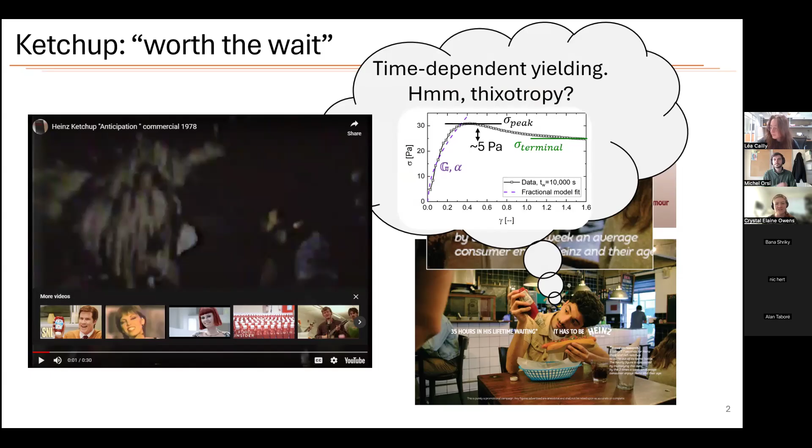Now, ketchup has a couple other impacts that are interesting. Something else you might be familiar with if you eat it a lot is called syneresis, where if you put some ketchup down, it'll have this sort of watery layer, especially in the first bit that you push out. And this is measured industrially by literally putting ketchup within a target, waiting and seeing how it spreads out from there.

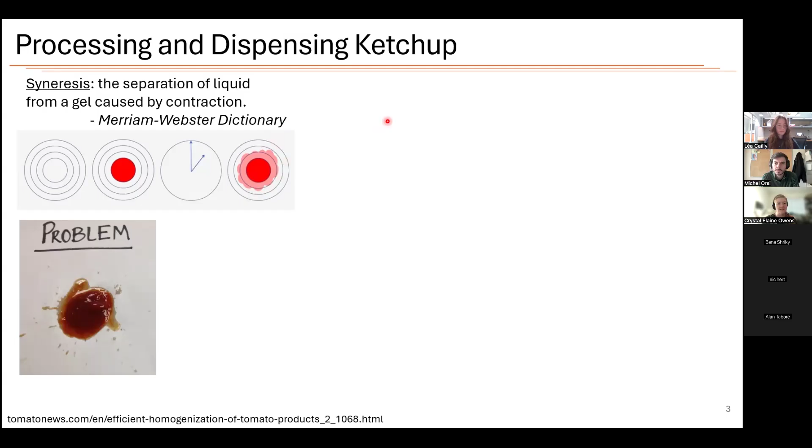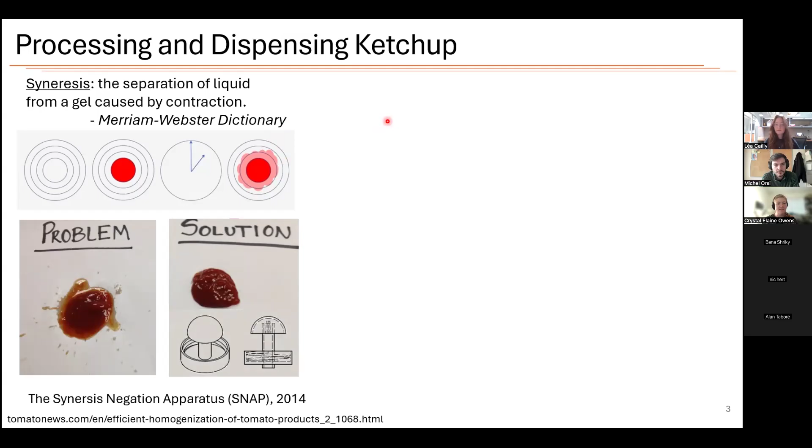And this has actually seen some inventive solutions. The reason this happens is that the water that's naturally in ketchup separates from the gel over time. So if you have something to mix it, like this patented solution, the syneresis negation apparatus, a cap that you attach to the end of your bottle and extrude through, it mixes the ketchup while it comes out, and you no longer have this problem. But this is something I have yet to see on the market shelves. So this is an unsolved problem within the ketchup industry.

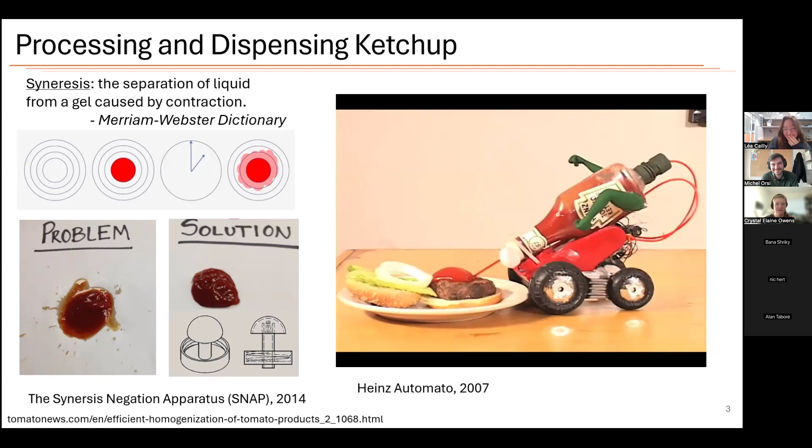One other interesting application of the dispensing of ketchup is the Automato, which is an RC car that someone has made to automatically dispense ketchup. So this is not completely automatic. This is someone who actually has a little remote control that is moving the bottle around to put the ketchup onto the burger.

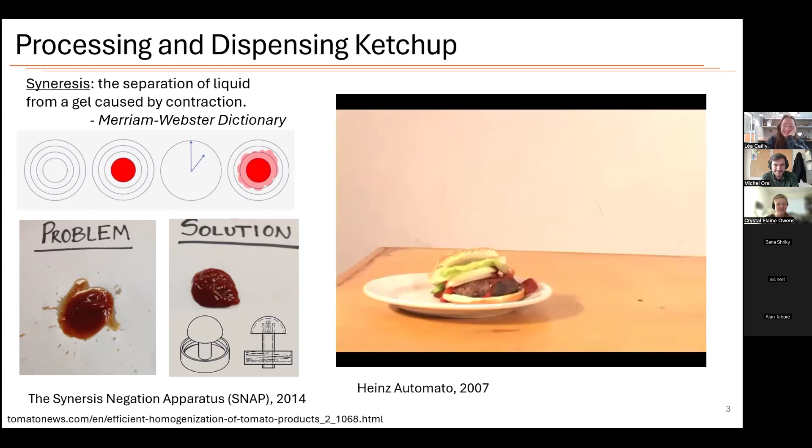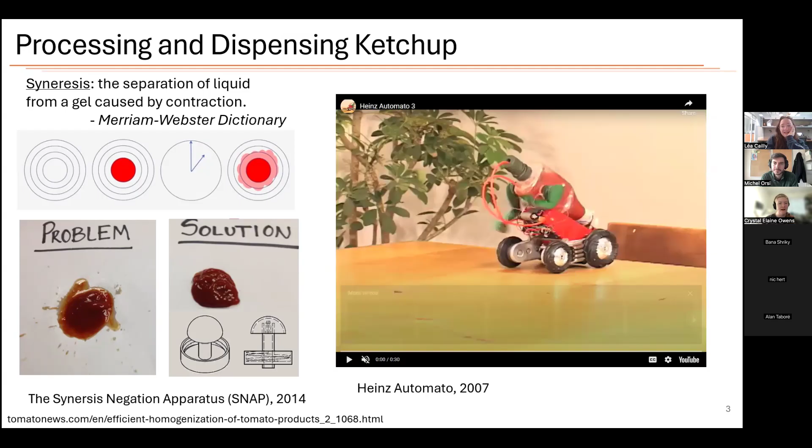And I know ketchup in the context of how popular it is in America, but worldwide, tomatoes are produced in nearly every country in fairly large quantities. So there are hundreds of millions of metric tons of tomatoes per year that result in a few million tons of ketchup every year. And within America, the numbers are a bit hard to track down exactly, but there's 10 to 100 billion ounces that are consumed, resulting in 1 to 10 kilograms per capita.

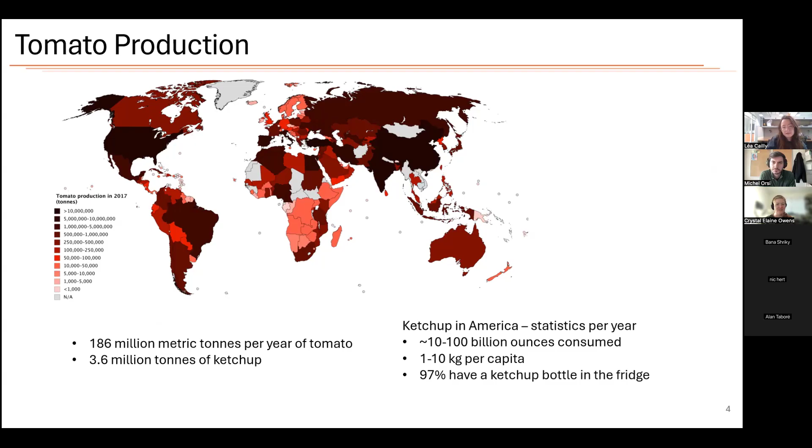So on average, every person has a few kilograms of ketchup. When one ketchup packet is about 9 grams, that means that everyone eats about 100 to 1,000 of these per year, which seems like a reasonable number. But also ketchup is so widespread that one study said that 97% of Americans have a ketchup bottle in the fridge. And so this is also partially motivating our study, that any insight we can have into ketchup can potentially impact 97% of Americans, and whoever else around the world is dealing with ketchup or related salsas or hot sauces or other condiments.

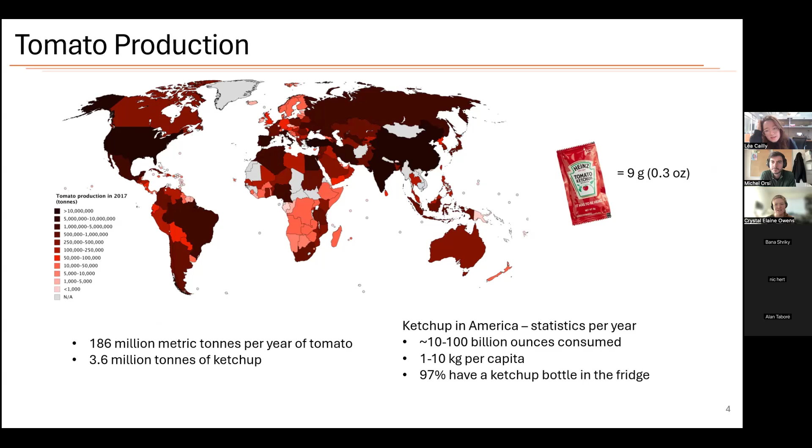And so we started our investigation by doing a natural study of what happens in a ketchup bottle. So this is a regular Heinz squirt bottle that I have with me that I dissected so that we could get a very clear view of what's going on inside. So let's say we deposit a little bit of ketchup on the top corner.

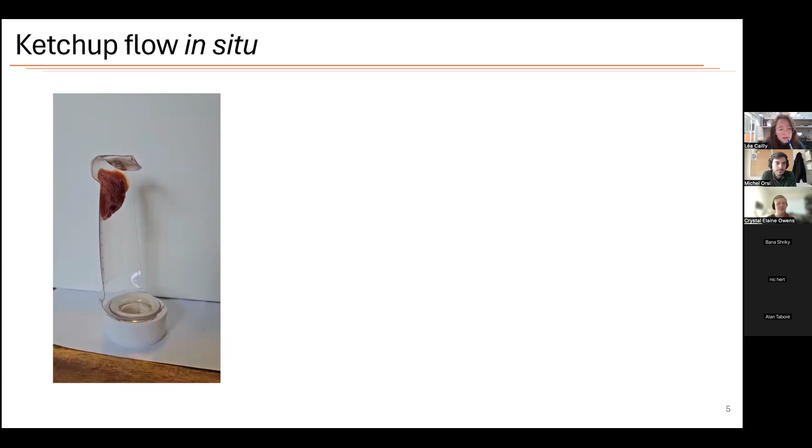And then we can observe what happens here over time. Just under gravity, the ketchup starts to flow. And we can make some back of the envelope calculations, where we want to get what is an average stress experienced by the ketchup during this process.

The ketchup has a force of gravity. It has some characteristic dimension and a density. So maybe this is something like ketchup under a controlled stress experiment of maybe 50 pascals or so. And so it also clearly experiences wall slip.

And so this is something we might say is one case of what happens when you have ketchup you're trying to get out of the bottle. And this is probably one of the best case scenarios because everything kind of comes out smoothly, but it does take quite a while. So if we're thinking about the time of 5.7 seconds, we're definitely slower than that because it takes longer than that for the ketchup to even noticeably start flowing.

In another case, if we start with a lot more ketchup, we see other effects where the ketchup almost immediately starts falling down, but it ends up leaving a streak that stays even after 10 minutes.

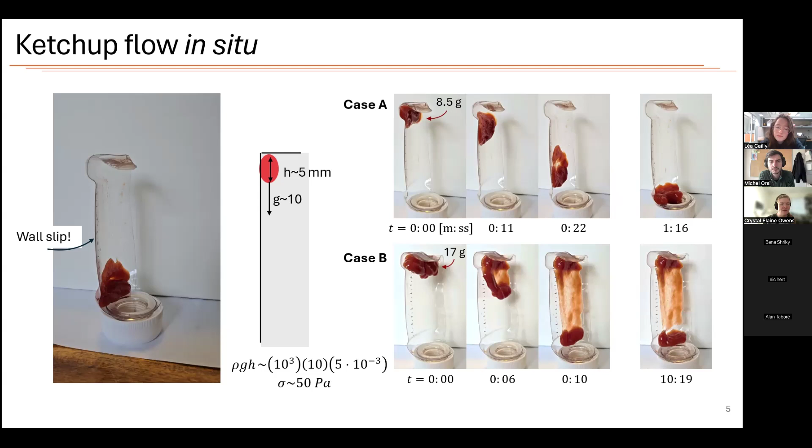And I should also point out that what we're doing is different from what people know as LiquiGlide, which is another product that came out of MIT where people were studying the surface coating of bottles so that they could get all of the ketchup out of a bottle, where they have an oil impregnated textured surface within the bottle. But in this case, for this presentation, we're discussing the ketchup material itself and not really the surface or the surface coating.

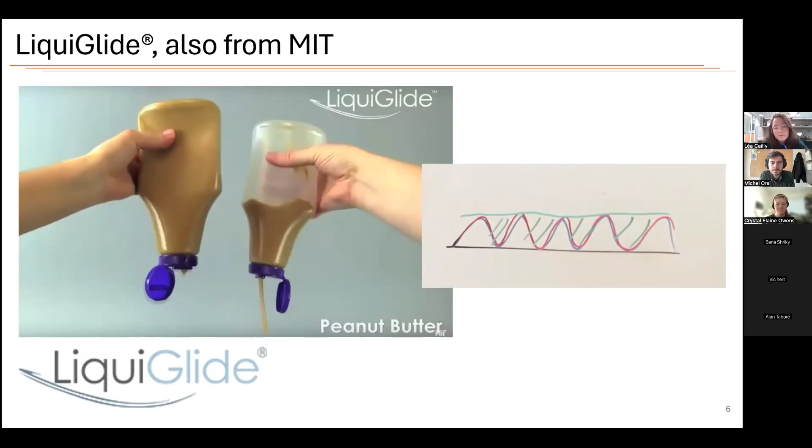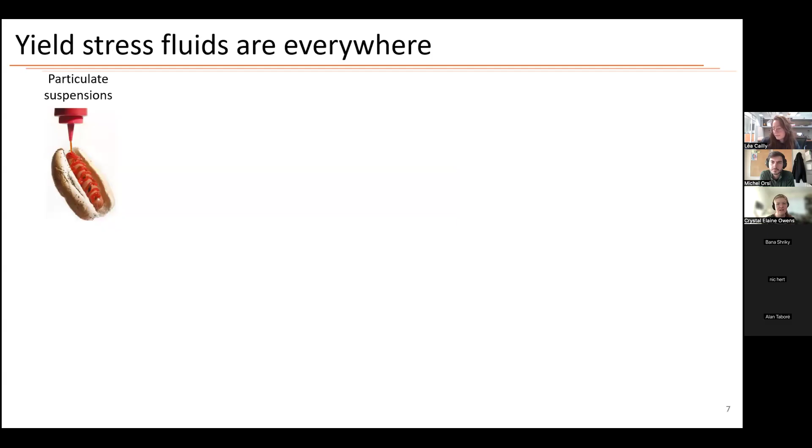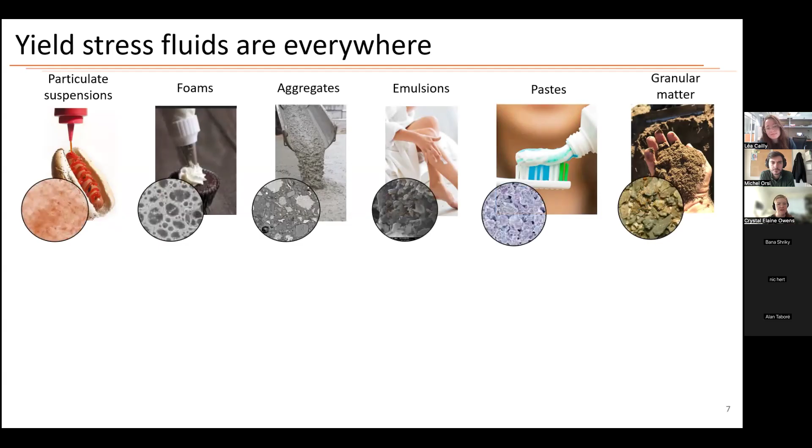And another reason we're interested in ketchup is it's a good example of a yield stress fluid. So yield stress fluids are fairly pervasive, along with particulate or fibrous suspensions like ketchup. You see them in other food products. You see them in building materials, in healthcare products, and dirt and soil and clay in the world around us. And these are all united by having common features of the microstructure, where they have particles inside that are able to jam and interact.

And these interparticle interactions lead to the time-dependent effects that we see and that we're frustrated by and that we're so interested in studying, like hysteresis, thixotropy, aging, shear banding, wall slip. And ketchup, I already said, experiences some thixotropy that we're mostly ignoring right now, and also aging and wall slip, which we'll be talking about more.

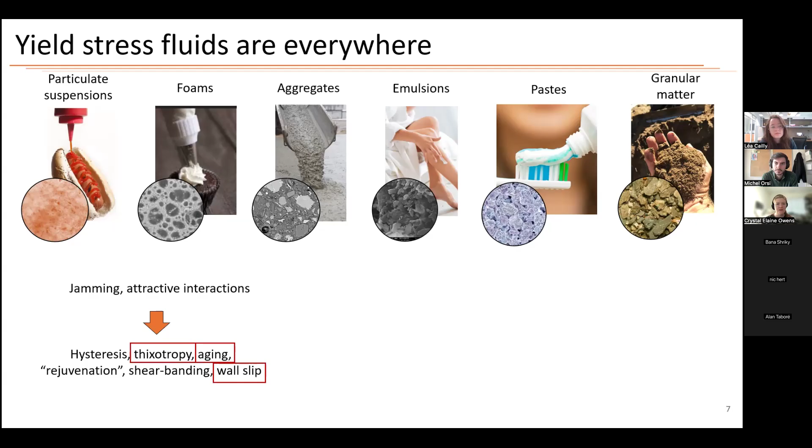And one of the basic ways to understand this is using a Herschel-Bulkley model to model the flow of ketchup. And so this has a yield stress parameter. So below a certain stress, the material will act like a solid, and above this stress, it will start to flow. So it will have a flow curve that looks approximately like this with a plateau region and then flow.

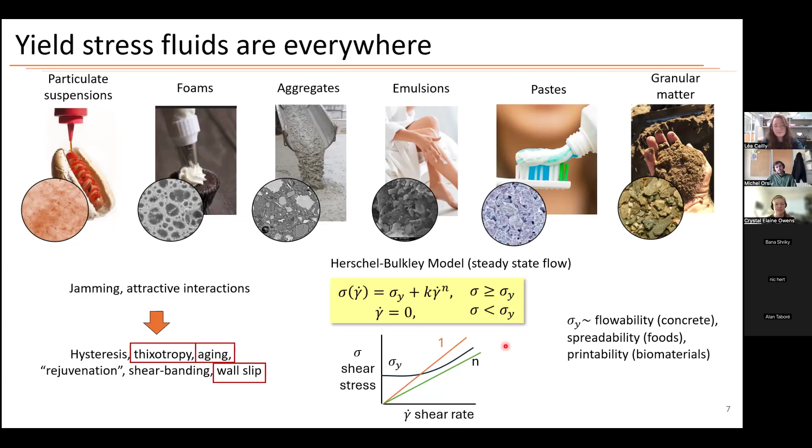And this is in contrast to something like a Newtonian fluid, which will flow under any imposed stress at all, or a shear thinning fluid, which you probably heard of, which will flow, but just with a different slope compared to a Newtonian fluid. And this yield stress parameter itself is very important for understanding and characterizing materials with different applications.

And now how we actually make a measurement is when we go into the lab, we go to our rheometer and we will put sample material into a cup or whatever sample holder we have on the rheometer. And then we have, in this case, a vane that we insert into the material. And so this goes in, this rotates, and as it rotates, we will apply a rotation rate, and then we'll measure the resulting torque to get our values.

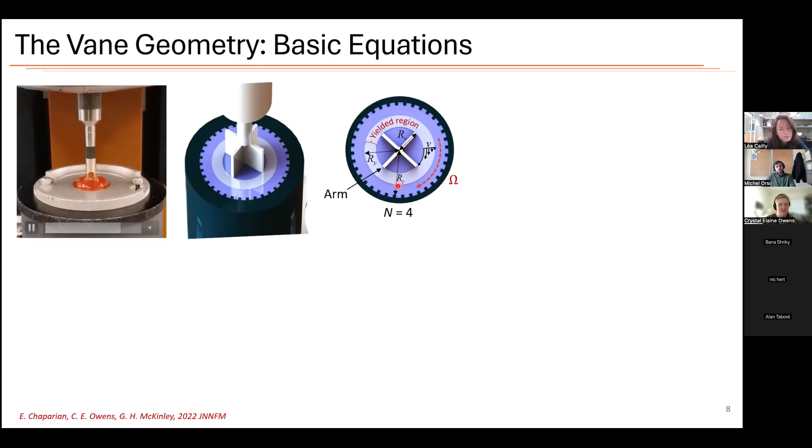So here, this is a vane that has 4 arms. It rotates, and then it yields some portion of the material, so that you have a radius of the vane, a radius of the cup, and then a radius of the yielded portion of fluid. And then we use certain equations that we've developed for translating the measured torque into material shear stress.

Which for this case, what is often used for the vane is a cylindrical stress model. So you just assume that even though this is something with 4 arms, it behaves as if it were a cylinder. And then for translating

Sorry, my animations are behind. Oh, there we go. It's strange. Okay. Sorry, minor technical glitch.

We also convert the rotation angle to strain, where theta is the angle that the vane has rotated, and strain is the material level measure of the displacement. And so for this, we're using an equation that does assume some simplicity of the material, but it's approximately close enough for our case.

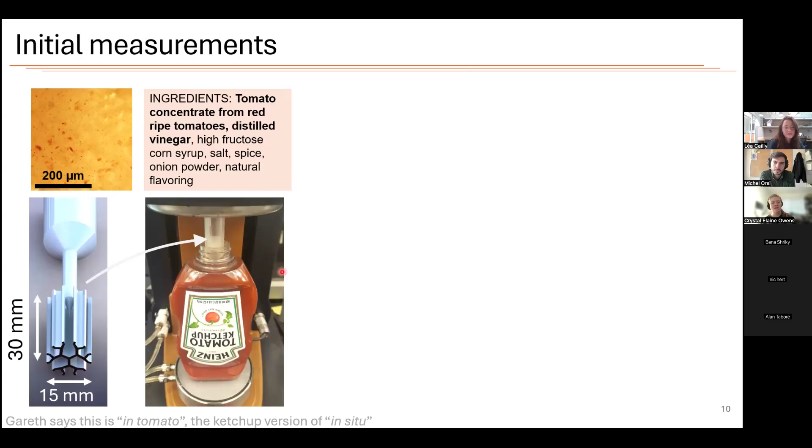And so we take our vane and we measure directly in the ketchup bottle. This goes beyond simply having a tool that's designed to not displace a lot of material: we're able to measure without even dispensing into another cup. This is not exactly new; there are fixtures for standard rheometers where you can mount whatever tool you want. But for our case, being able to measure in the bottle itself is fairly necessary for measuring the pristine microstructure without having to disrupt it at all.

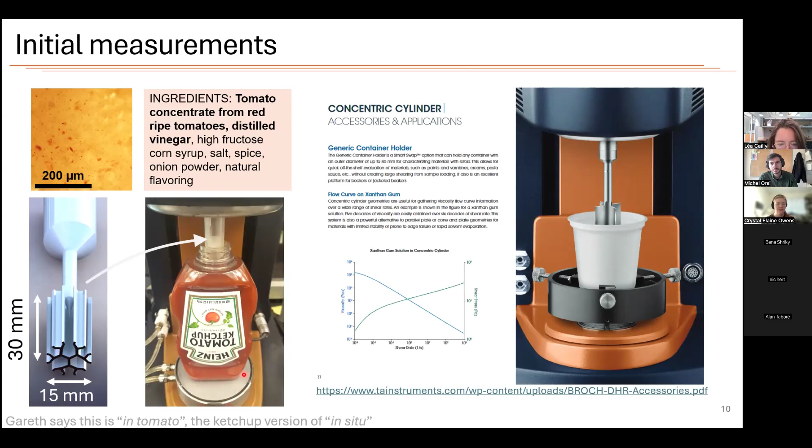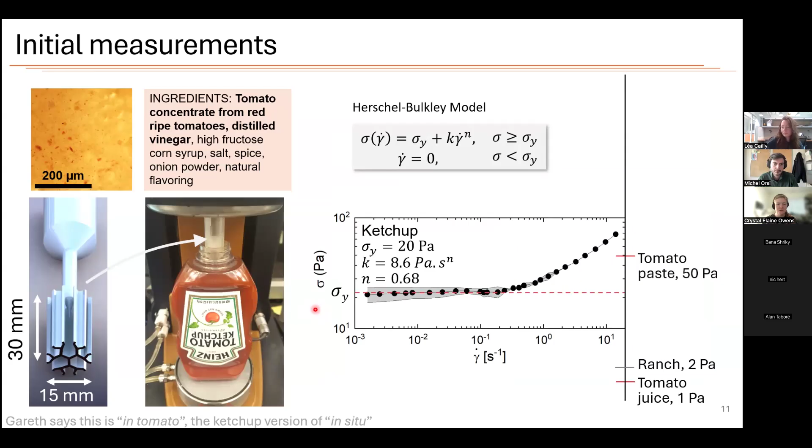And so what we get, going back to our Herschel-Bulkley model, we have a flow curve for ketchup here, and we find that the yield stress is about 20 pascals. To give you some context, tomato juice is about 1 pascal, ranch is 2, tomato paste is about 50, mayo is 60, then you have peanut butter, which is much higher, and then Oreo cream, which is 10 kilopascals. So ketchup is fairly flowable, but it has some noticeable structure.

And you can see it has the characteristic regions. It has this plateau with yield stress, and then it has this flowing region once you get to higher shear rates. This data was measured for the average of 5 runs, so you can see there's a little bit of error here around the yield stress. But this is the model fit.

So now we want to understand the time-dependent properties. What happens if you start from rest? To do this, we do creep experiments. How these work is you start with a pre-shear, a preconditioning step to reset the material to the same initial starting position for each of the tests. Then you apply a constant stress, and this is the creep experiment. We do this for different stresses relative to the level of the yield stress.

So the results of the creep show that initially you have an inertial response. This is just part of how the test works. Then you reach a plateau region. Here, this is for stresses that are below the yield stress. There's creep. This is Andrade creep, where you have a very shallow time dependence where the material is very slowly creeping inside.

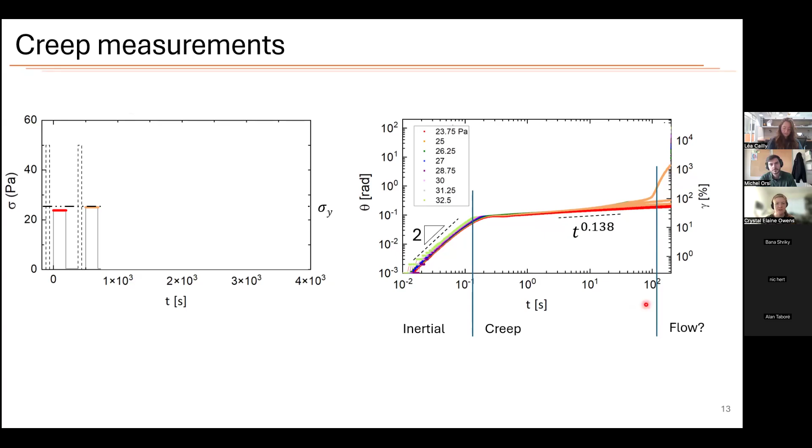And then maybe it looks like we have hints of some flow after you get a couple minutes through the test. And we can keep in mind the 5.7 seconds that we were thinking about earlier. Clearly, if you apply too little stress, this would be equivalent to having only a very small amount of ketchup in the bottle that's flowing under gravity. Then you are missing the 5.7 second mark.

Now, if we apply higher level stresses, so these are stresses that are well above the yield stress, then we get flow. And so here, as the stress increases, you see a definite transition from material that acts relatively like a solid to fluid that is flowing readily. And this has a slope of 1 up at the top here. That is just basically pure displacement. There's no inertia, it's just material flow. And then we can see there also seems to be a little bit of a transition region here, so we can mark a critical rotation angle.

Right, so this is tracking what is the angle of rotation as you apply the constant stress. And this is a function of time. So we have the angle here, and then we have the strain here. I mark both of those because the angle is something that we know for certain. We know where the vane is, we know how much it has rotated, but the strain is something that is a little bit dependent on how much of the material has yielded. It's slightly less of a precise value, so I just mark both of those.

And now if we measure in the middle, this is where the most interesting things happen. And so here we see we very neatly complete the data between the low and the high cases. So the most interesting thing here is this is called delayed yielding, where material seems like it's relatively stopped, and then all of a sudden it reaches this critical value and then it flows.

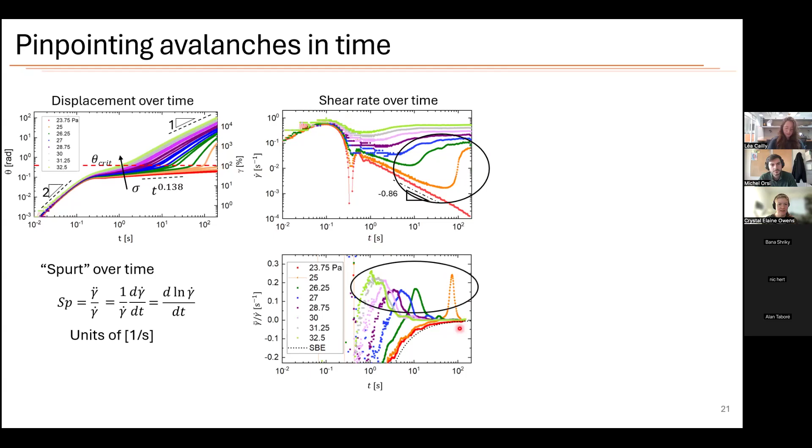And so we can take this information and we were able to plot what is the central time of the peak of the avalanche for each of these as a function of the yield stress. And so as we approach the yield stress from above, a value of 1 here would be applying exactly the yield stress. We see the time it takes to reach the avalanche increases very sharply, where we would expect this to basically diverge. So it can take longer and longer for the material to start to flow. And so this is again compared to our 5.7 seconds.

It's clear if you have enough stress, or equivalently enough ketchup in the bottle, then you're going to very safely get ketchup to flow within that time scale. If you have less ketchup, then it can take much, much longer for the ketchup to flow.

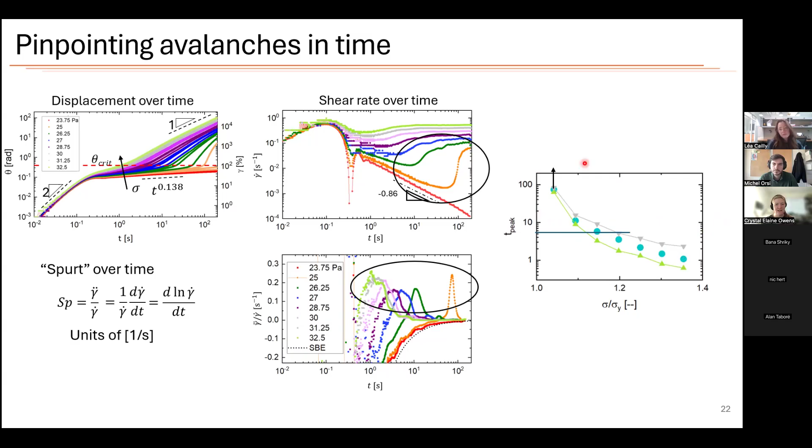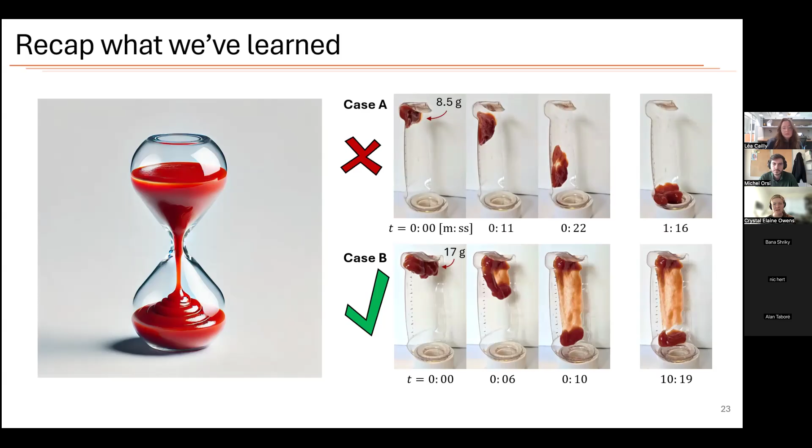But the first case, where the material slides down the sidewalls, this is something we haven't discussed at all, because one of the reasons we use vanes for measurement is avoiding slip entirely. But we will now want to understand slip, so we have to do something a little bit different. So to do this, we went back to the lab, and the normal rule of using a vane is you want to insert it completely into the material. But we decided to break the rules of measurement and actually measure with the vane at different heights, either at the surface or a little bit above.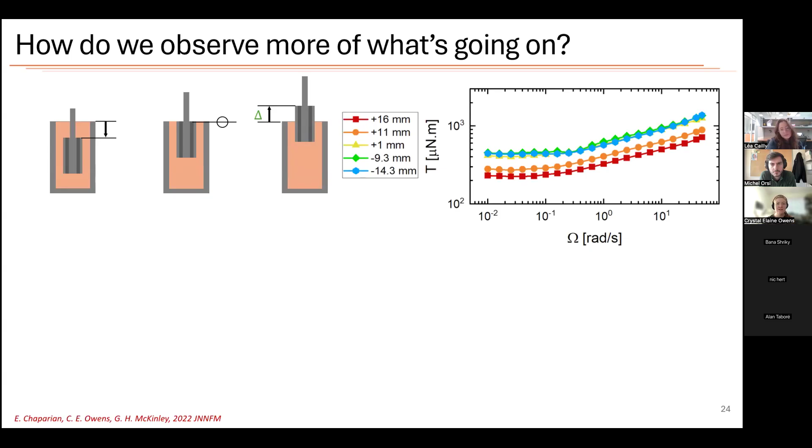And we measured the same flow curve we had before. Here, this is in machine units, in rotation rate and torque rather than stress and shear rate, because we're still figuring out what's going on. And we have the equations that we had before for how we understand the torque as a function of everything else. And from these equations, we could work out likely conversion factors if we wanted to understand the material properties of a material that we're measuring with the vane not completely submerged.

So we made two conversion factors. These just use the ratio of the torque that you would expect in the basic case and the torque on a vane that is incompletely submerged, that is, something that has this partial submersion compared to something that has full submersion. And so, for example, if you have a vane that is under or at the surface, then there's no change here. If you have something that's a little bit above, then this value starts to decrease. So the shift factors would look like this, where as long as it's below the surface, it's about 1. And then you see less and less torque just as the vane comes out of the surface.

And it turns out that this actually was able to, without any modification, collapse all of our data onto itself. And so this is a very interesting finding because this means that we're measuring the same data no matter how deep the vane is in the material.

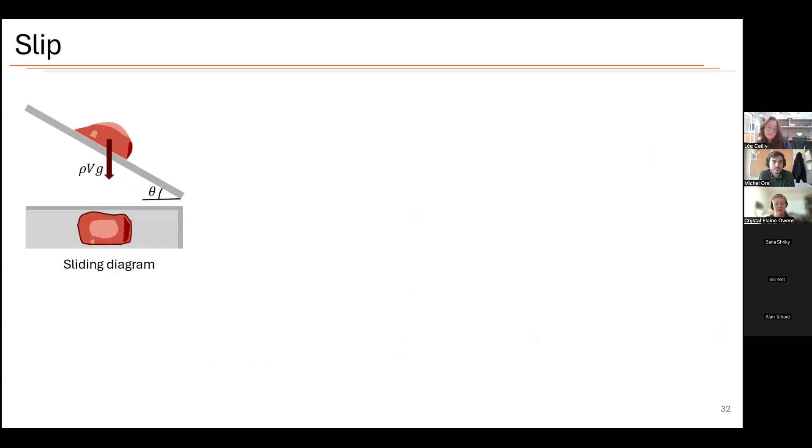But in this case, slip is dependent on the interaction of the ketchup with the surface that it's on. So rather than using this 3D printed material, we set up another test to measure slip on the ketchup bottle itself. And so for this test, the idea is you have ketchup sliding down an inclined plane under the force of gravity. And so with the other half of the ketchup bottle, I mounted it on an angled holder.

And so you add ketchup, you watch it slide down, and then you can measure what is the sliding velocity, which is the key parameter, as a function of what is the mass, what is the angle, which describe what is the stress that's going to be applied. So we did this, in this particular case, it leaves a large track of fluid as it goes down. So this is more like case B that we were looking at before. And so we did this for several different cases with different amounts of fluid and different measurement angles.

And so the equations that we're working with here is we have a wall shear stress on the force of gravity divided by the area of contact that it has. The top image here is a side view, the bottom image is a top view. And then we can approximate what is V over the area of contact as something like an effective height and use that to develop an equation. So rho g h sine theta describes what is going to be the approximate wall shear stress as the ketchup falls.

And so we measured what is the sliding velocity using videos and my apparatus. I have the sliding velocity and then I have what would be the time for the ketchup to fall, knowing that the bottle is 100 millimeters tall for the bottle that I have. So in general, if you have a lot of ketchup or a high angle, this results in a high shear stress. And so you always have cases where you leave residue as the ketchup falls.

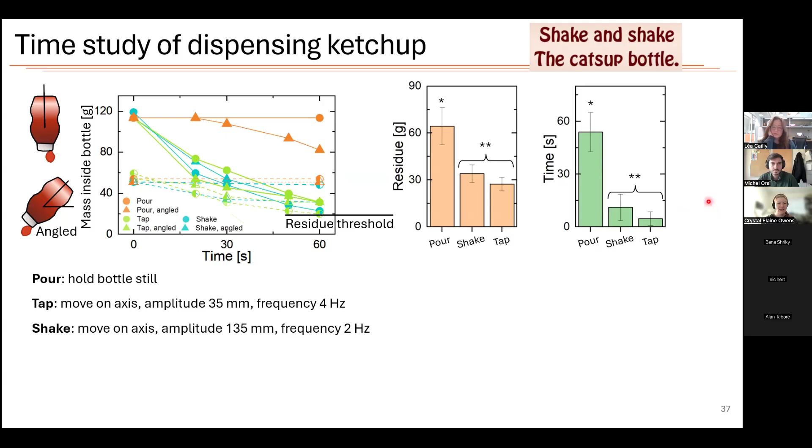And then if you remember that a ketchup packet is about 9 grams of ketchup, that means that we're actually leaving a lot of residue in the bottle when we try to do this. And this is in the context of having a container that has about 400 grams total, which would be 44 packets. So we're leaving as much as 15% of the ketchup still in the bottle.

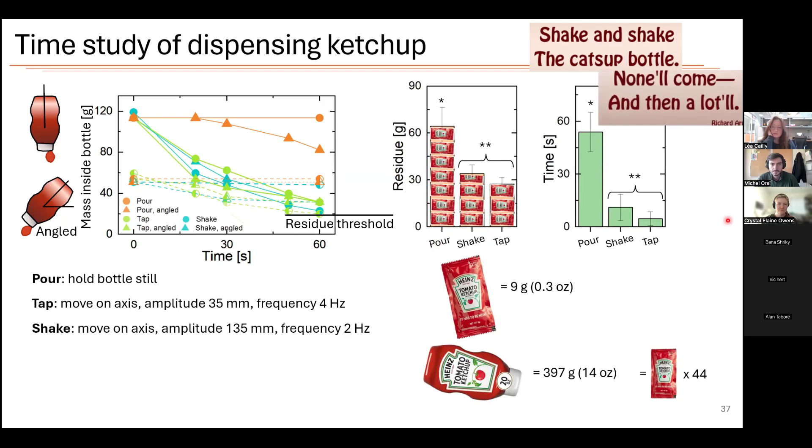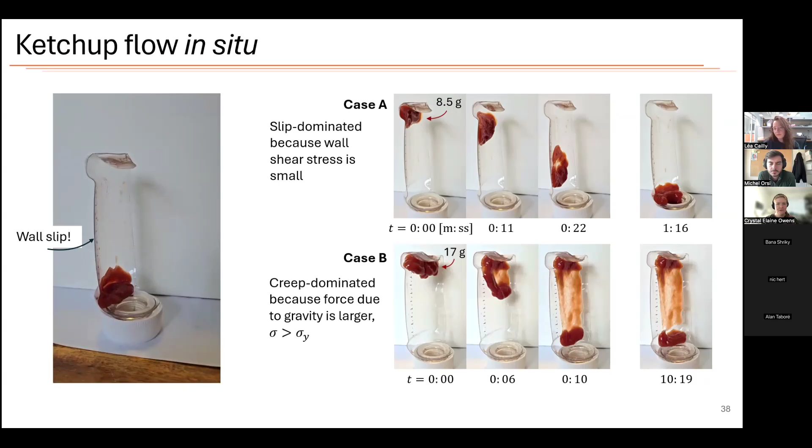And then in the second case, we already discussed, this is mostly dominated by creep and avalanching flow because the force due to gravity is larger because we are starting with more ketchup here. So in conclusion, I have presented you with the data that can help the 97% of Americans with a ketchup bottle save time and food, where you can shake rather than just pour. I've given you information that you can use in the kitchen to look at what's happening in your ketchup bottle or other condiments and see if they behave the same or differently. There are tools for manufacturers to think about dealing with the residue that's so often left in ketchup bottles.

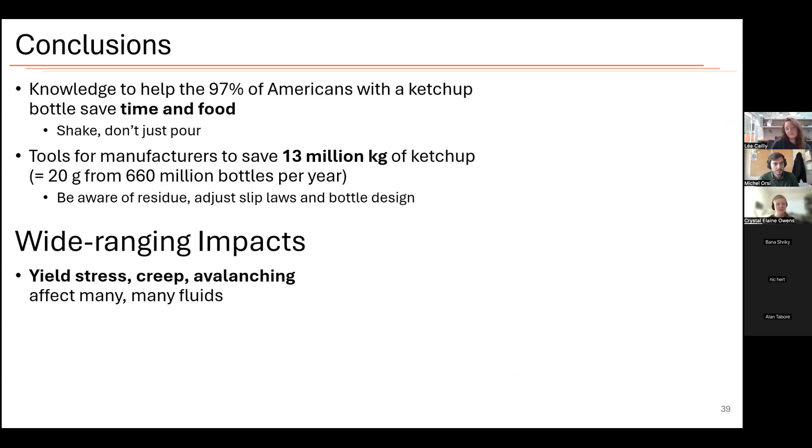But beyond ketchup itself, we have more wide-ranging impacts from the tools that I've discussed and the measurements we've made, where yield stress, creep, and avalanching are present in a vast array of fluids of different scales and different types. For any material that goes from a non-flowing to a flowing state, these sorts of tools are useful. And specifically, we have equations to measure avalanching timescales, which can save lives, especially if you apply these to actual avalanches.

And we have tools that allow you to directly view wall slip and material deformation, which can allow new data collection for a wide variety of materials. And so one final suggestion from our study is if you look at the ketchup bottle, if you look at it very closely at the outline, you see that a lot of where residue comes from is it actually gets trapped at the walls. And so a simple redesign of the bottle, rather than having to have any special coating, if you just eliminate these sharp corners, you could save those extra few ketchup packets worth of ketchup that get stuck inside.

And then one last recognition. So just in light of the name of this webinar series, MIT is definitely a fan of Douglas Adams and the Hitchhiker's Guide. So there was a hack when he passed away saying, "So long and thanks for all of the wit." Where they had this and then they had a towel, which if you're familiar with the series, you understand why that is important. You always need a towel. Yes. Then you look prepared.

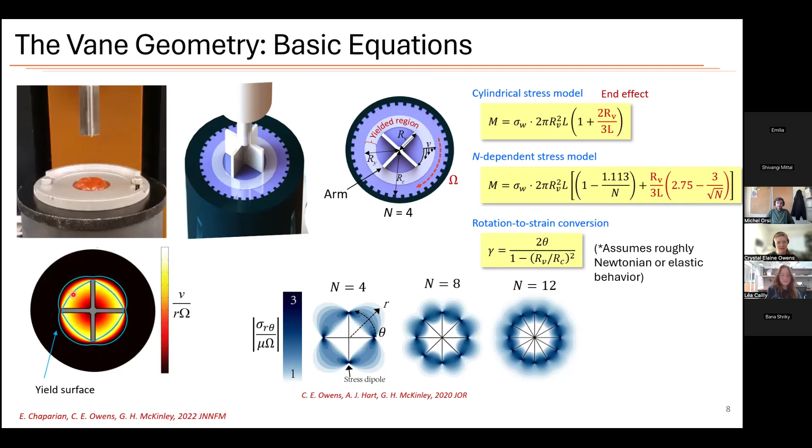And this avoids slip because rather than having a smooth, actual metal cylinder that the material can slide on, the material is shearing against itself right here. So you get shear deformation. So you actually do want material to be trapped inside here. It's not moving inside the radius of the vane, but it is shearing on the outside. So you do want that. You don't want bubbles. So you could choose maybe a 4-arm vane if you have a lot of bubbles or aggregates, so that you can insert it and have it very smoothly filled with material, but you do want the material to not be sliding or shifting inside. Okay. All right.

So then, do you think that for this kind of vane geometry, there's a range of viscosities or yield stress that you would have to limit so you can use this type of geometry? I think the biggest challenge would be if there are some sort of aggregates, then you definitely want the spacing to be large enough that nothing gets trapped. But here you can see the example where we have the vane inserted into ketchup. It's very smoothly filled these holes.

This has a yield stress of about 20 pascals. If I insert into something that has a yield stress of about 100 pascals, I start having to maybe use a spatula or something to make sure it gets filled in. But if you have a challenge like that, this is a 3D printed design that I have shared online. If someone wants to make their own, you can just scale it up, which can also handle things like aggregates or filling the small void spaces.

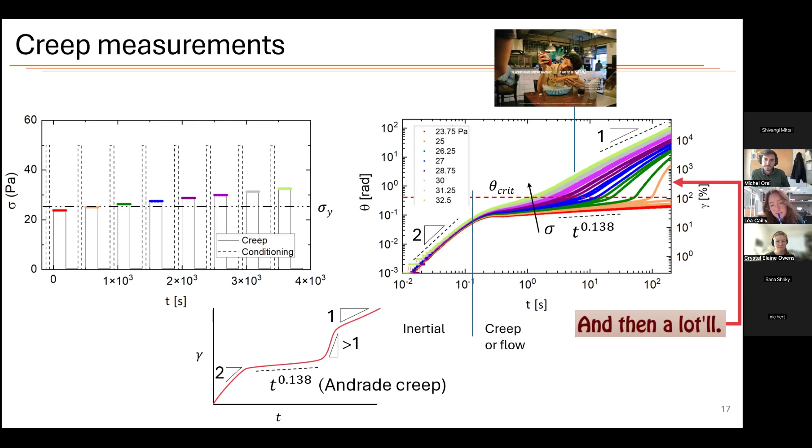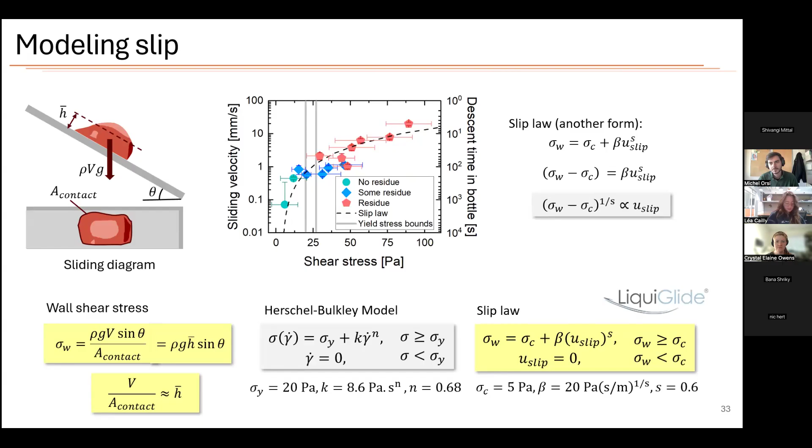So you mentioned that if you take a little amount of ketchup, it easily slides down, and there is no residue left behind. But if you take a lot of ketchup, it slides down quickly, but there is residue left behind. So my first question is, what are your thoughts on why this happens? My intuition is this probably happens because of the weight. With a lot of ketchup, it's exerting more weight, so it's able to shear it more.

And my other question is that there is a phenomenon of residual stresses that has been observed in thixotropic materials specifically. Does it have something to do with that, or is it something else? Oh, residual stresses are really interesting. I think they're present in every yield stress fluid, so they're definitely present here, although I didn't measure them in particular. Usually residual stresses are retained by the material up to about 10 to 20% of the yield stress. So in this case, that would be about 2 to 4 pascals.

So I don't think those are playing a role in the residue that's left when the material slides. I think it's exactly what you said, that if you have enough stress, the material is sliding, but it is also under enough shear stress that it is above the internal yield stress and it is able to shear. So rather than sliding purely, it is sliding on a very thin layer of additional ketchup. And it's only in this very narrow region where you are above the critical slip stress, which is set by the plastic bottle material.

You're between that and the yield stress, and there it's able to slide, but it's under little enough stress that it's just above one critical stress but still below the other one, so it's able to slide without internal shearing. Oh, I see. This is almost similar to adhesion versus cohesion. It's only interacting with the material, but it's able to slide as if it were a solid. Okay, I see the point. Thank you.

I don't have any measurements of the local weight distribution, but I would assume that it's fairly uniform, basically based on the height of the ketchup in local areas. Obviously the geometry is not controlled as this slides down, so we're more or less making assumptions that it's sliding just as a solid object. The math that I had worked out assumes that it has an average height, an average area, and otherwise it's treated like one solid object. Although factors like that could lead to some of the slight noise in the data as it goes down, or those could be effects of the ketchup itself being inhomogeneous.

Nice. And another couple of questions from the chat. What type of dye did you use to mark the surface pre-tests? And were all these tests performed at room temperature? Oh yeah, that's a good question because people usually use ketchup when it's colder if they keep it in the fridge. I did everything at room temperature because of all the different devices I was using. It was much easier to keep it all at one constant temperature rather than changing it back and forth.

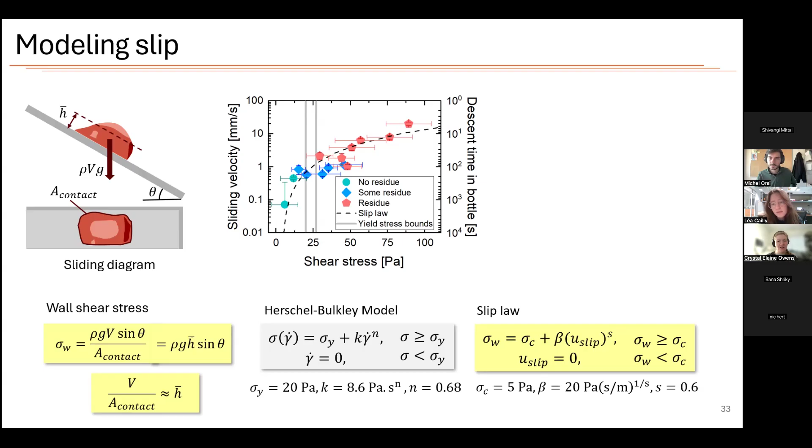By dye, if you mean the surface marking, I used graphite flakes that I put down. So it's just individual particles, and this is why as the vane rotates and shears them, they kind of become invisible, because they have been mixed in with the material. It's just graphite that you would get for lubricating car wheels or something.

All right. As you're on this slide, I also had a question about these vane experiments. Do you observe any sort of Weissenberg effect? Does the ketchup try to climb the rod when it's fully submerged? Because I see some ketchup above the volume line. Oh yeah, that specifically happens because to insert the vane, I insert it a little extra and then come back up so that this surface is flat around here. Otherwise, it would be displaced down just a little bit. We don't see anything like rod climbing with ketchup. I've tested other materials like toothpaste, anything with a lot more elasticity definitely has very distinct climbing.

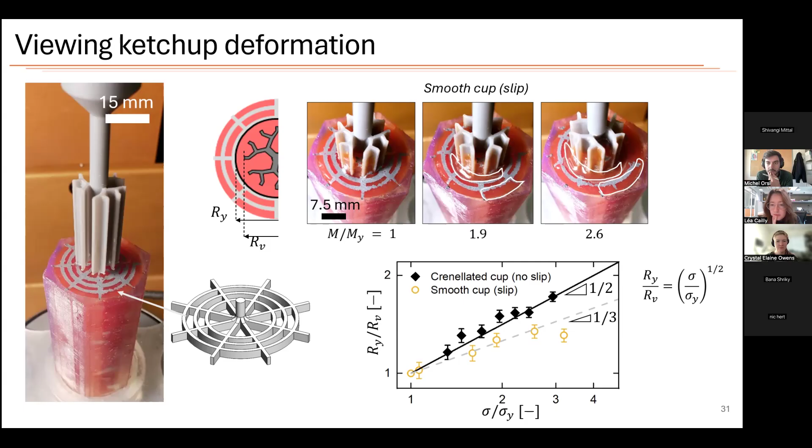And when you did your vane experiments inside the ketchup bottle, do you think the shape of the container itself has an impact? Yeah, I think certainly it does have an impact. You can also see it's not circular. But even more trouble than that is it's flexible, which means that if we're rotating the vane at a high enough rate, the actual dimensions of the vessel are going to be changing very slightly.

So for our case, I had measured in the ketchup bottle and also in a standard geometry, and I found an effective radius that makes the two measurements the same. That effective radius is basically the smaller width of the bottle, because it's kind of rectangular. So this is acting as if it's shearing just like a circle. It's mostly confined by the small dimension, and the big dimension is just holding additional ketchup.

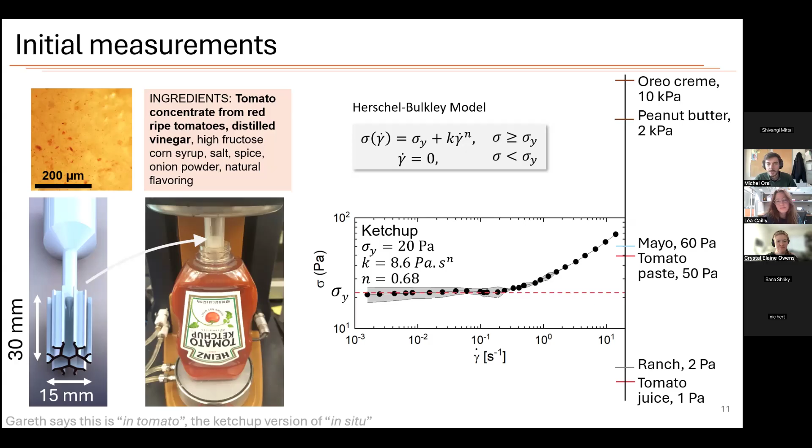Great. And one last question for me. When you did your measurements of how long the ketchup takes to get out of the bottle, depending on if you shake it, if you wait, or if you put it vertical or inclined, what exactly was the procedure you followed? Yeah, these tests were done manually. The procedure was preloading ketchup into the bottle and making sure it's on the back side of the bottle, so it's always in the same location.

Okay, so just a small amount of ketchup. Yeah, and so it would be the weight that I had listed, which is either about a third full or about 10% full. That I measured with a scale just to make sure it was always approximately the same initial conditions. Because if you have this thing full of ketchup, then the ketchup's just going to come out, and that's not interesting to study. So these were the cases of like, oh, there's some left, or there's just a little bit. How do you get it out?

And do you think that the fact that it's harder for the ketchup to get out when you hold it vertically is also due to the fact that you need air to go back in while the ketchup is getting out? I think in these cases, it's actually kind of stuck to the top surface here. When it's vertical, it has some suction force that it needs to fall down from here, compared to if this is at an angle, then the ketchup can just slide down. This becomes an angled surface rather than something where the ketchup has to separate from itself. Here it just has to slide. Yeah, so it's kind of changing how it's able to move. Exactly.

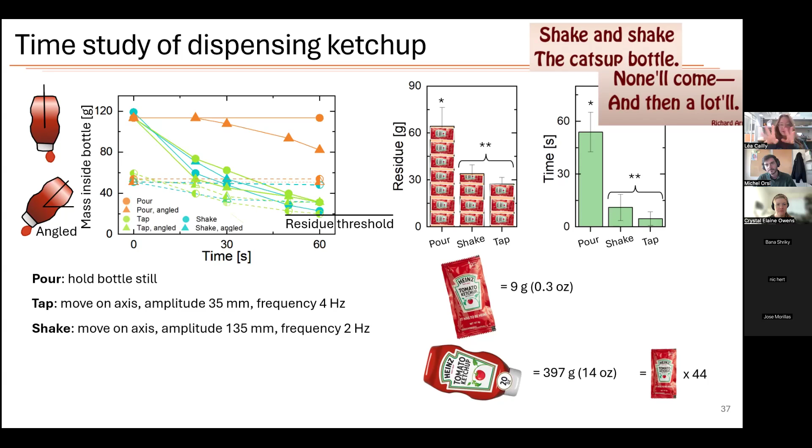Well, I had some question, but I think that it's already a very long video. How did you create your geometry? How did you find out exactly this shape? Was it work that you have done, or someone else's work? I don't know if you can go back to your vane. Yeah, the one on the right. This geometry is not something that I've seen before, I think. How did you come up with that?